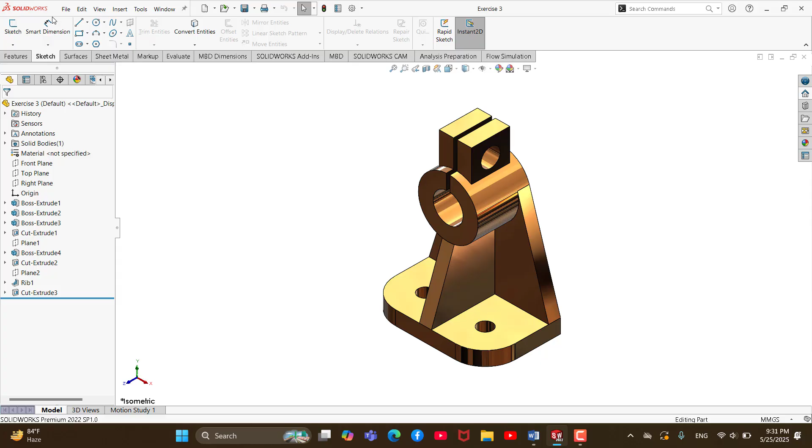Now let's get started with our today's design. Viewers, here the front view, left view and bottom view of today's object are given, so go to SolidWorks and go to the file option, click on new, and click OK.

Firstly, we need to assign the dimension unit, and we will choose mmgs unit, and we will start our design from the top view.

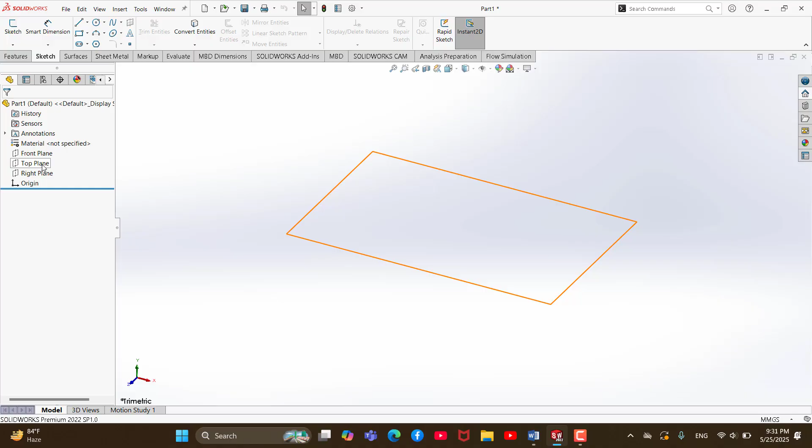Now viewers, you can see here the bottom view. Here is the rectangle, which is 63 millimeter width and the length is 100 millimeters. So we will start our design by getting this basement.

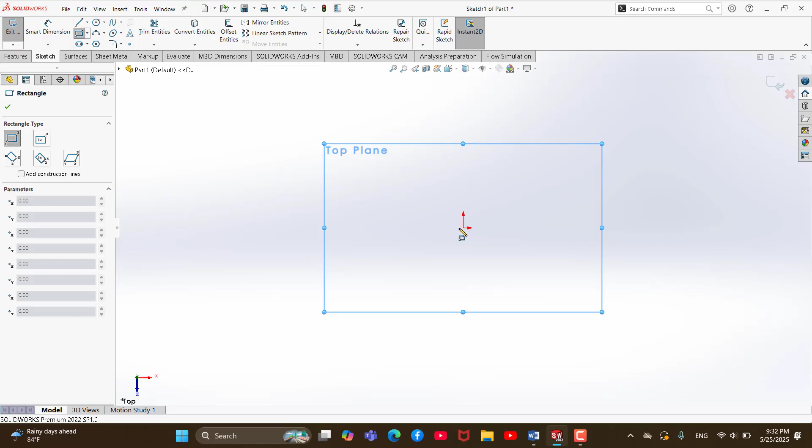Select the top view, top plane, and sketch a center rectangle here. Give the dimension: the length should be 100 millimeter, and the width should be 63 millimeter.

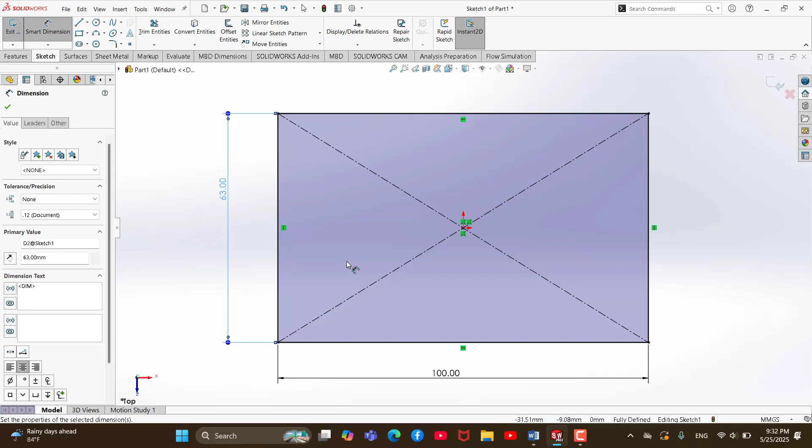Now you can extrude this object, and then you can do the fillet or make a hole after extruding this body. But we will do this now.

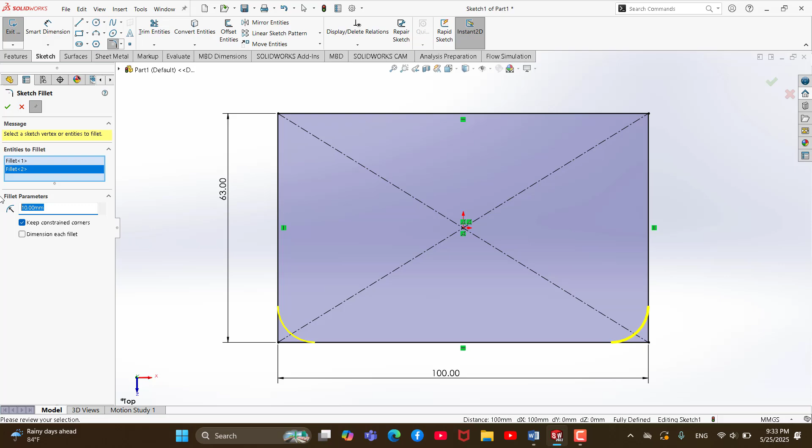For getting the fillet, just go to the fillet option and select this corner and select this corner, and here the radius should be 25 millimeter. Give the dimension, give the radius 25 millimeter.

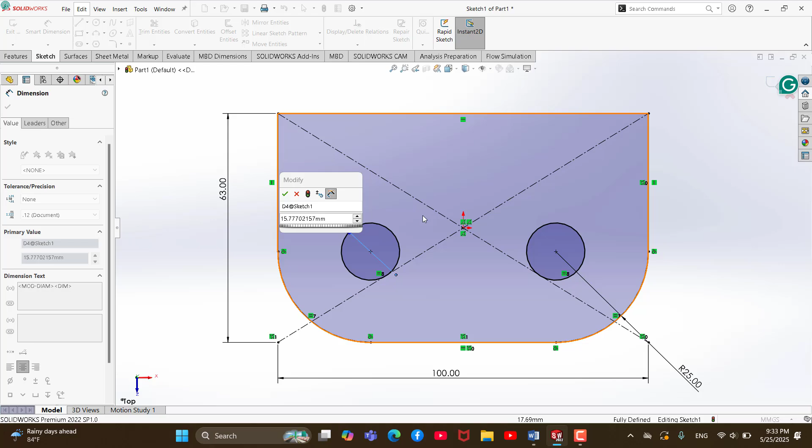Okay viewers, also create two circles here and make these two circles equal. The diameter should be 12 millimeter according to the question.

Now go to the extruded boss option and extrude it 12 millimeter, because the thickness is 12 millimeter, which is shown in the front view of this object. Keep 12 millimeter thickness.

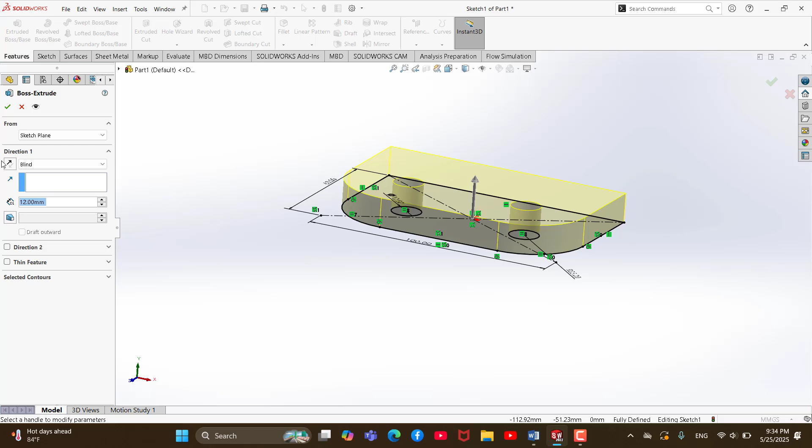Now our basement of this object is ready. Now we will create the back wall of this object, and viewers, you are also observing here is also a hole, and now we will make this back wall.

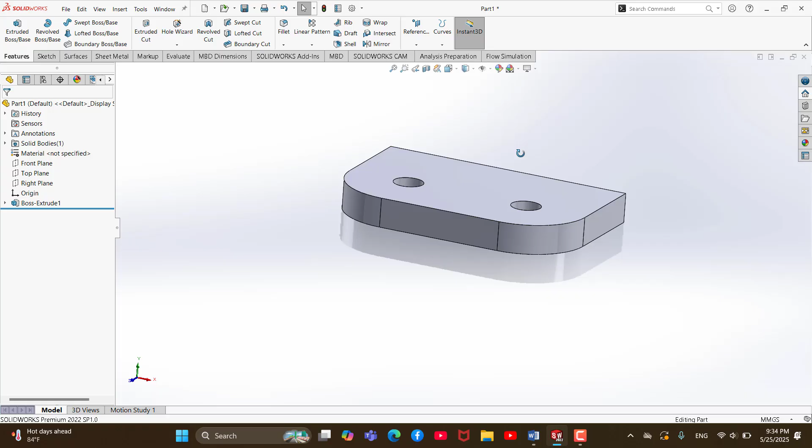Here the center of the circle is 90 millimeter far away from the floor. So go to the back face of this object and go to the sketch.

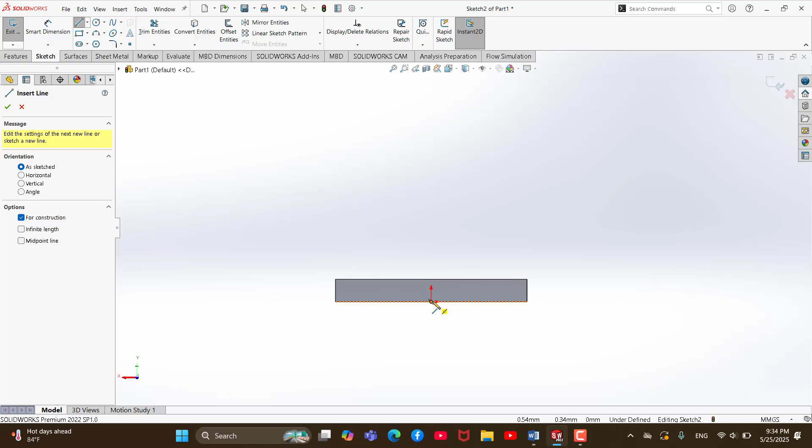Now create a center line here. Now draw a circle here, and the dimension should be 50 millimeter diameter according to the question. Keep the diameter 50 millimeter.

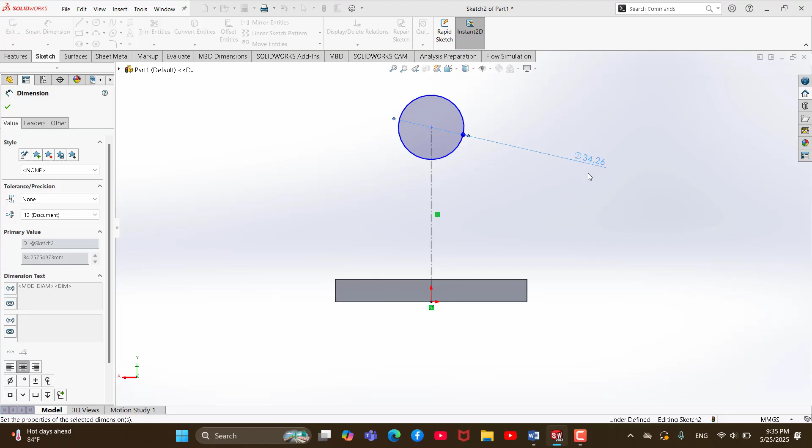Now go to the line. Select this line and select the circle and make them tangent. On the other hand, we will also select this line and select this corner and make them tangent.

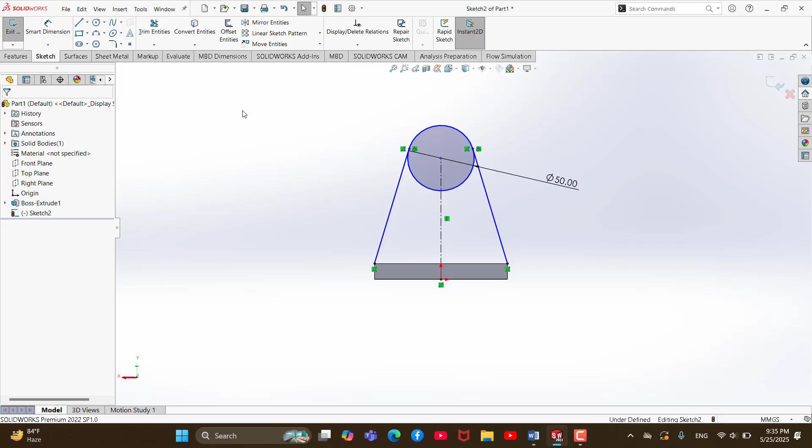Now the back wall is almost ready for extruding. Go to the extrude option, go to the selected contours, select this surface and select this surface, and extrude it in reverse direction. We should extrude this object up to 10 millimeter, because the thickness is 10 millimeter, which is shown in the question.

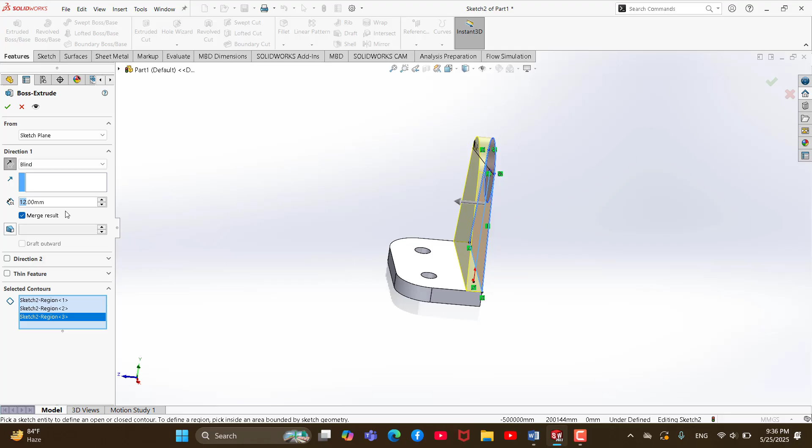Make it 10 millimeter.

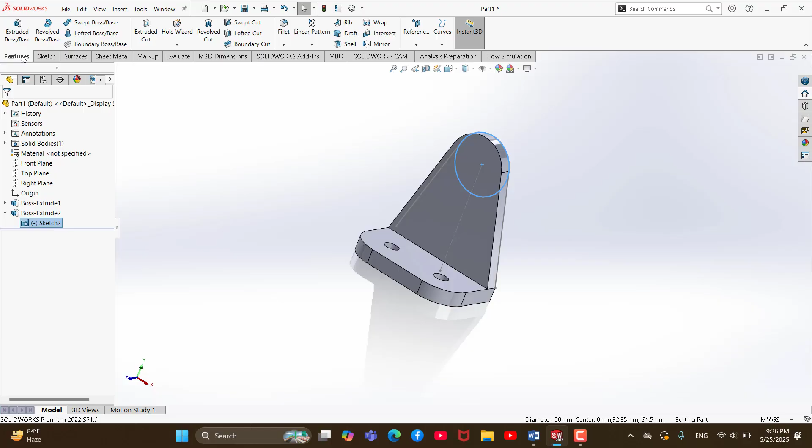Viewers, here we can also see that there is a hole. So for creating this hole, we have to go to the sketch option, show this sketch, select this circle here, go to the extrude option and extrude it in reverse direction. We should extrude it up to 44 millimeter, which is shown here.

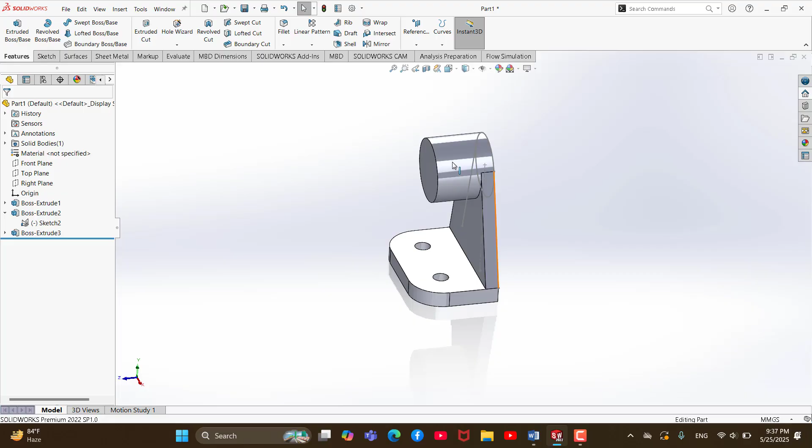Now we have to create a hole, and the diameter of the hole is given here, and we can see that the diameter is 26 millimeter. So viewers, select this face and go to the sketch option.

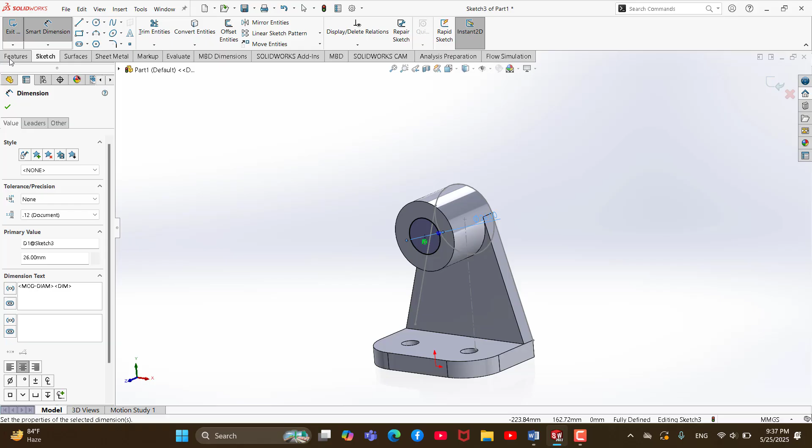Create a whole circle here, and give the dimension which should be 26 millimeter diameter. Go to the extrude cut option and make a hole through all. Go to the through all option.

Now viewers, we can also see that there is also an upper portion above this circle. For creating this upper portion, we need to take a plane. Viewers, you can also see this upper surface of this portion is 138 millimeter far away from the floor.

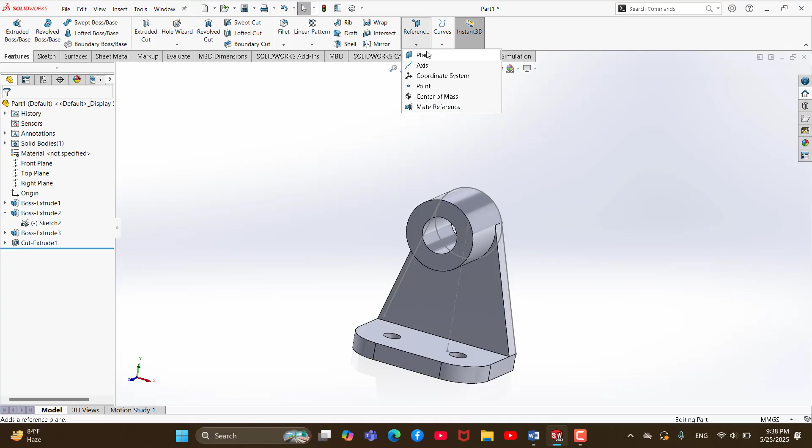Now viewers, we already created this basement, so we need to take a plane which should be 126 millimeter away, because we need to subtract 12 millimeter from 138 millimeter. Go to the geometry option, take a plane, select this face, and it should be 126 millimeter.

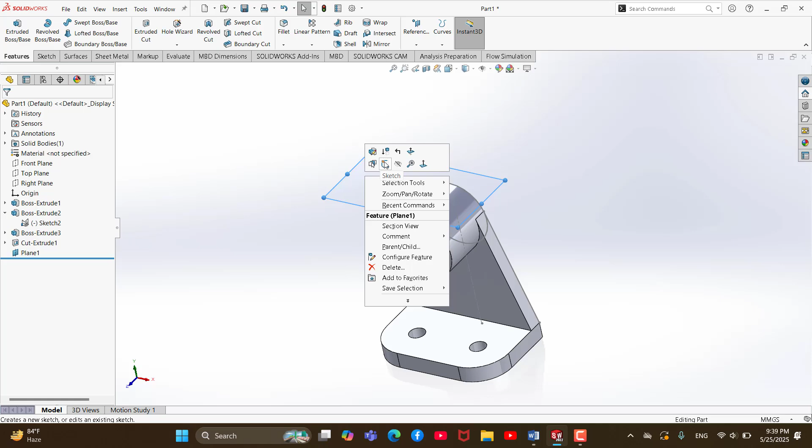Now select this surface, select this plane, and go to the sketch option and make it normal.

We have to create a center rectangle here, and here is our center. Oh no, sorry, we will create a corner rectangle here.

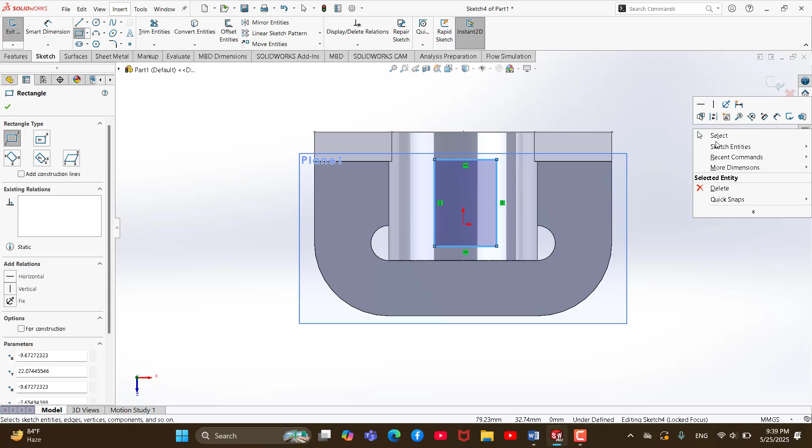Take the mid plane of this object and the midpoint of this line, and select this origin point and make them vertical. Now give the dimension.

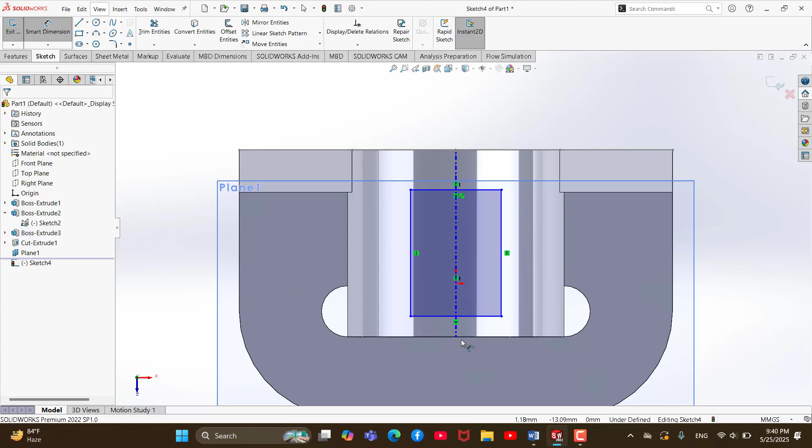You can see that this portion is almost 6 millimeter away from this edge. So give the dimension, and the distance should be 6 millimeter. Select this edge and select this edge, and it should be 6 millimeter.

Now we have to give the length of this rectangle as 32 millimeter. Select this line and make it 32 millimeter. Our design is complete.

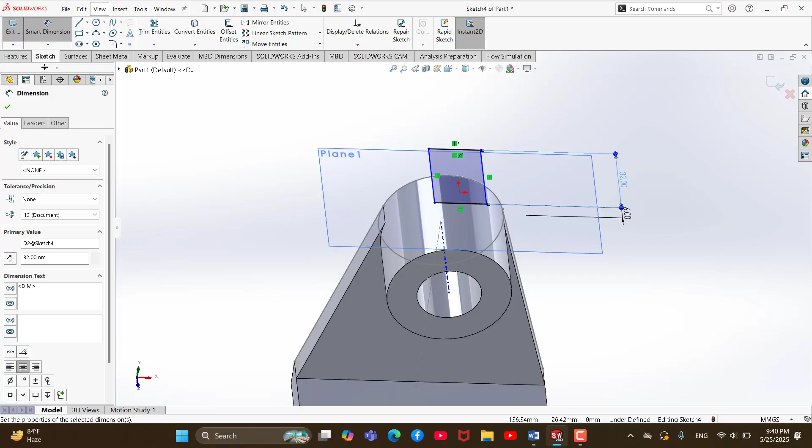Now go to the extruded boss option and extrude it up to the up to surface. To extrude this object, select this face. Now viewers, we have to cut this portion.

From the question we can see it is 33 millimeter, 3 millimeter gap. So select this face and go to the sketch option.

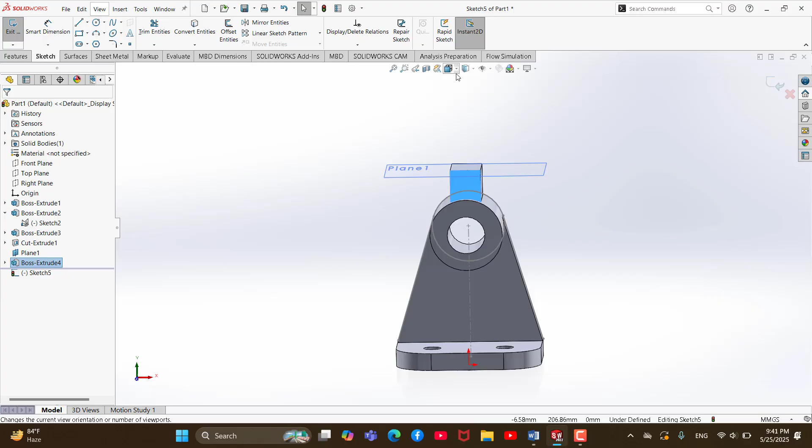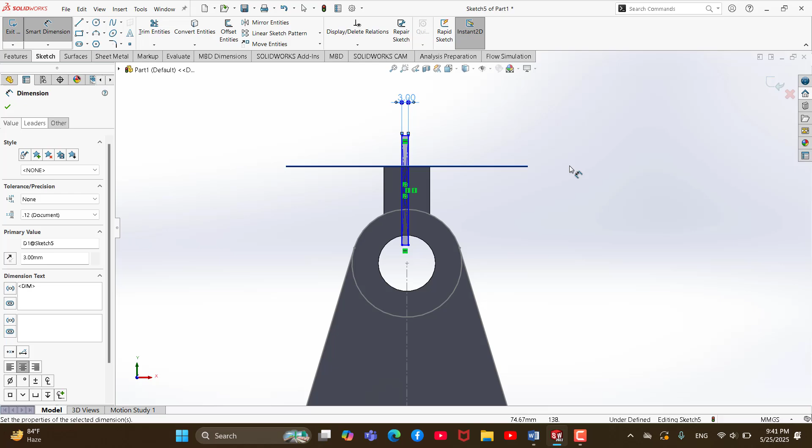Now create a center rectangle here. Sorry, it should be a center rectangle, and it should be 33 millimeter by 3 millimeter. And we have to make this origin, select this origin, and make them vertical.

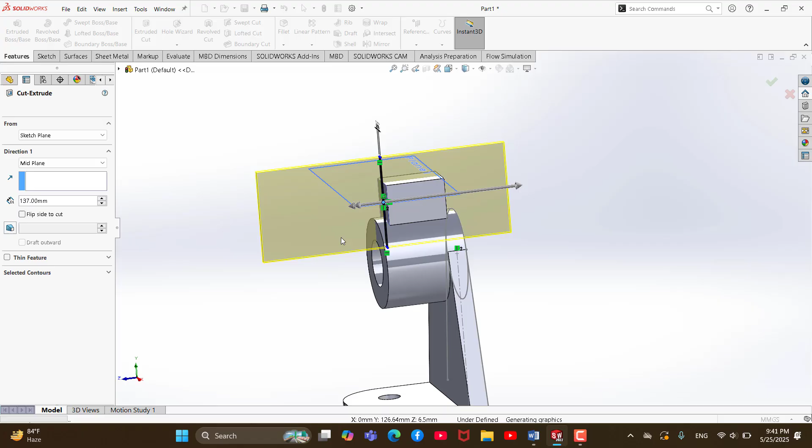Now go to the extrude cut option and cut this object in both directions, using mid plane. Now we can hide this plane and also hide this sketch.

Now viewers, we have to make a hole here. Here the dimension is also given: the diameter of this hole circle is 12 millimeter, and the distance between the upper edge of this portion and the center is 12 millimeter.

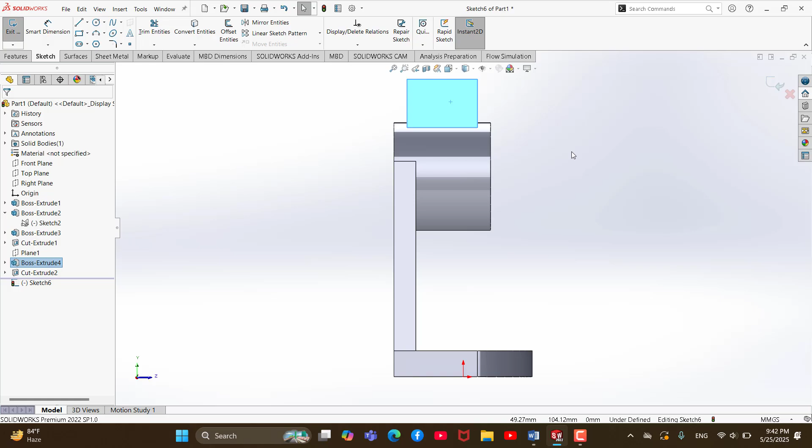Select this surface and go to the sketch option and create a circle here. We are finding the origin of this portion. The origin should be here. Now give the dimension, and the distance should be 12 millimeter.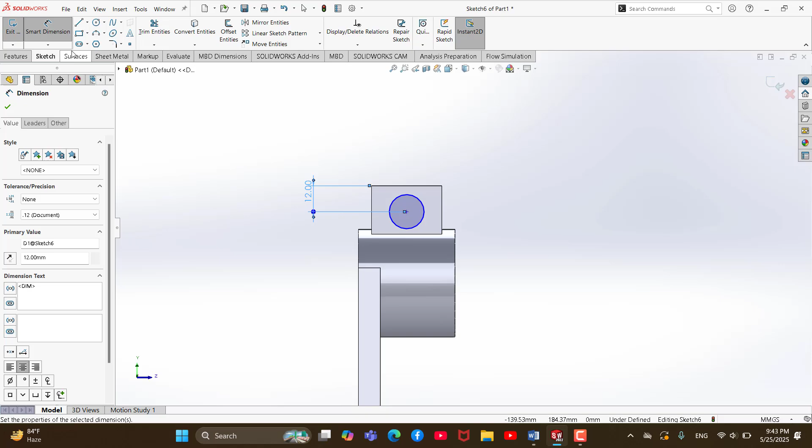And the circle diameter should be 12 millimeter, keep the diameter 12 millimeter. Go to the extrude cut option and cut this object through all.

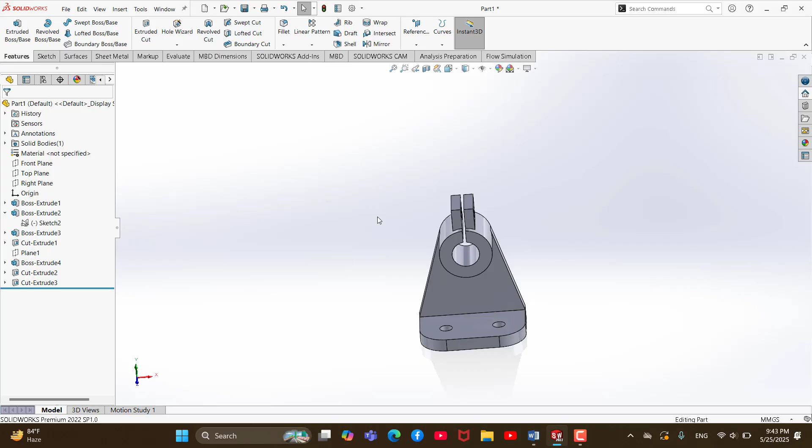Okay, our design is almost 90% complete. Now we have to draw these ribs. Viewers, you can draw these ribs manually, but we will use a new command in SolidWorks, and here the ribs are in the center mid of the object.

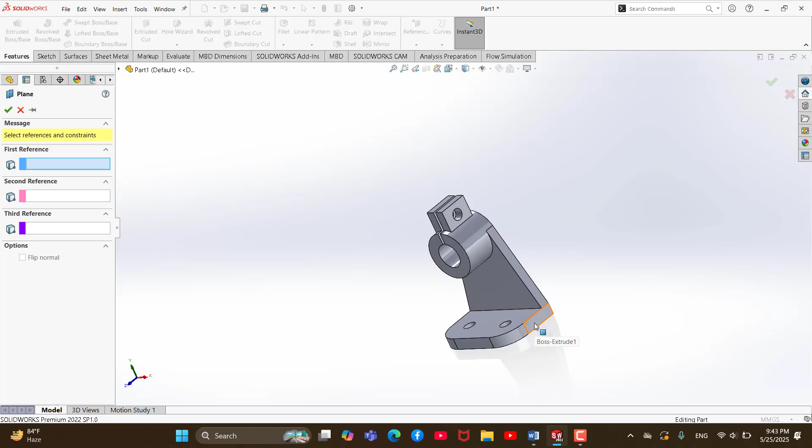So go to the reference and take a plane. For creating a mid plane, just select this surface and select this face, and you will get the mid plane of this object.

Select this surface, select this plane, and go to the sketch option and make it normal, then select this and create a line from this point to this point.

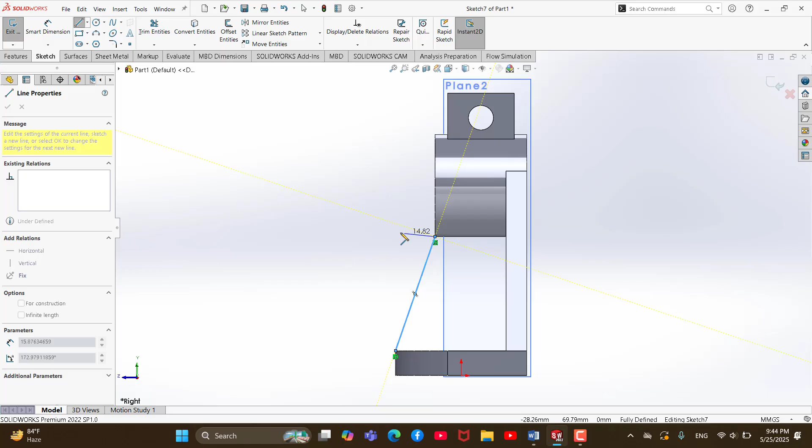Now go to the features and click on the rib, and the thickness should be 10 millimeter.

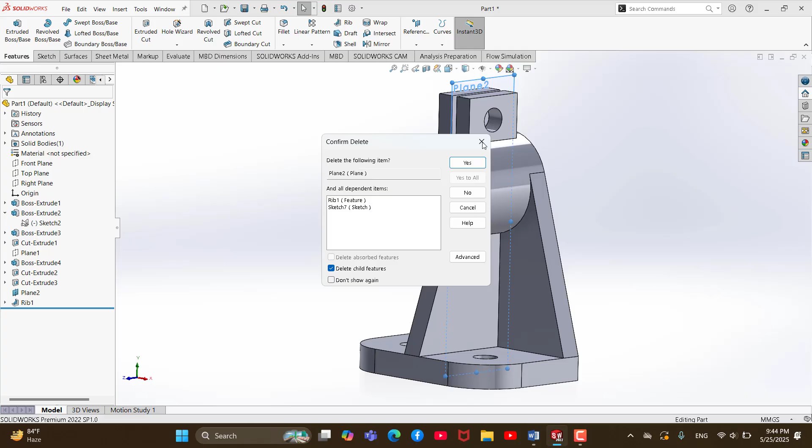This is the end of today's object, and thank you very much.

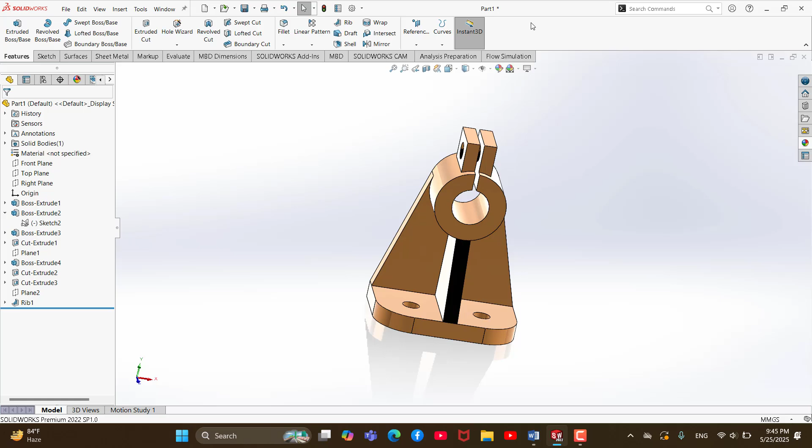Already we can also assign a metal to this object. Just go to the material option and we can check it here. This is the end of our today's design.